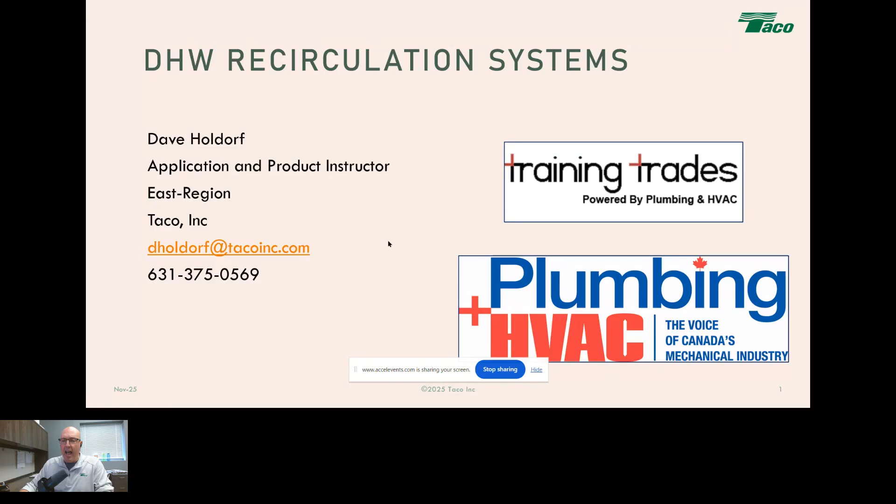So as we get started, I want to talk about why recirc. Why do we need to consider adding domestic hot water recirculation systems installed in homes? It wasn't always that way, and not everybody thinks about having a recirc system installed. But we have to think about history a little bit, and think about home construction and what's happened over the last 50 years. If we want to compare homes from 50 years ago, the average home size in 1970 was 1,500 square feet. Today it's almost 3,000 square feet. And think about the number of people that lived in that house, that house in 1970 probably had 6, 7 people living in it, right? Today's home, 3 to 4 tops. I mean, we can't have kids outnumber parents nowadays, that's insane, right? So with that home in 1970, we never had a chance for water to cool down in the pipes, there was always a line at the door to get into the bathroom in the mornings.

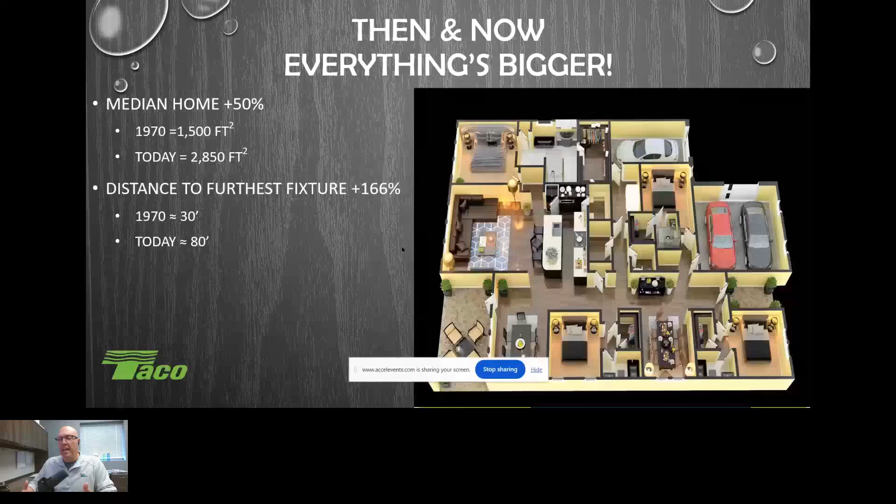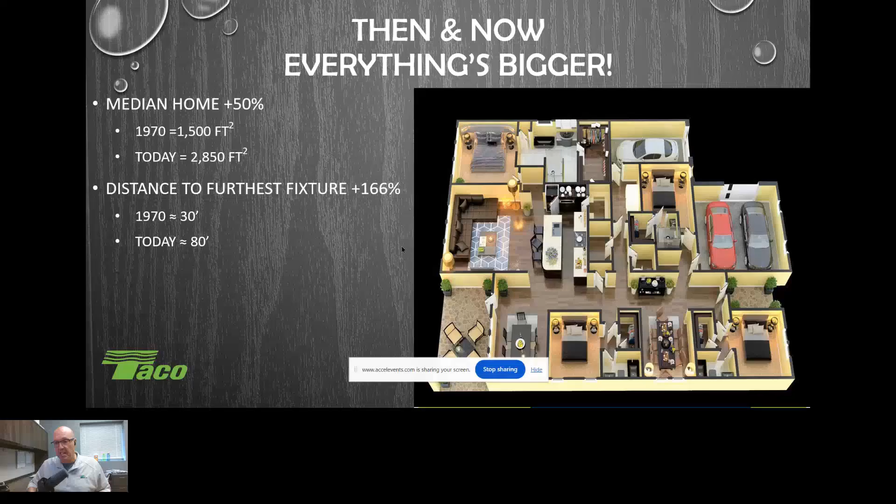So obviously, with home sizes getting bigger, the distance to the furthest fixture has almost tripled. We're putting fixture groups wherever we want. When you think of that home in 1970, that was a stack system, you had your water heater down in the basement, and your kitchen and bathroom shared a wall right above it. So you were 30 feet, probably less than 5, because it was stacked. You always put that water heater right underneath where the water was needed, and shared the wall, so very minimal plumbing. Today we're putting fixtures wherever you want throughout the entire structure. Obviously, by doing that, we've also doubled the number of hot water fixtures installed in the house today, and that doubling of fixtures also increases the demand for domestic hot water.

For example, even in my own house, I did a renovation 10 years ago. As I was renovating, I did a complete gut: new plumbing, new electrical, new heating, new insulation, everything. As I was replacing the outdoor spigot in the front yard by the driveway, I put in a hot-cold valve. I wanted the ability to have hot water at the driveway if I wanted to, because at the time I had a lab, and we loved going on hikes in the woods in the mud. If anybody's got a lab, you know how dirty they can get on a nice hike. So I wanted to be able to hose her down in the driveway after a walk, or wash the truck, whatever.

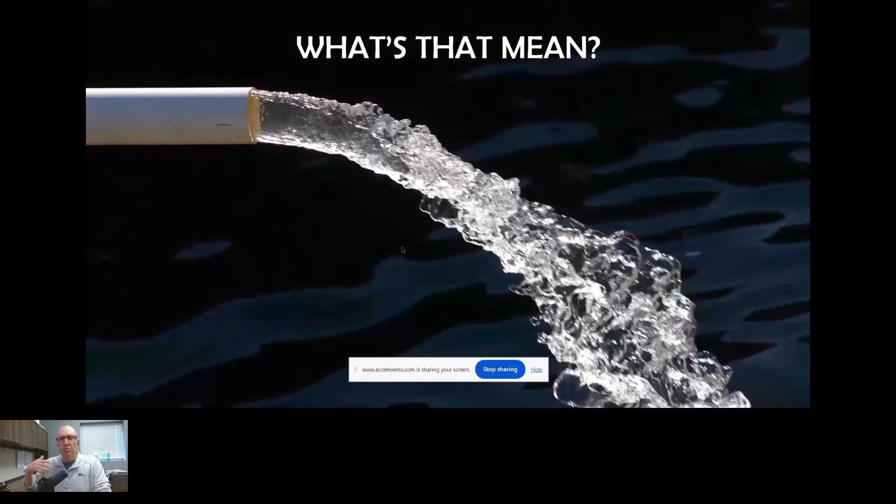So your number of fixtures have doubled. What does that mean? It's getting bigger, but what does that mean to delivering hot water out to your house? The more fixtures you have, the more volume of water needed, especially when it comes to plumbing codes and sizing your pipe. Because you have more volume, you're going with bigger pipe. Think of a home in 1970 — it was plumbed in half-inch copper, you're done. Today we're looking at 3/4 inch and 1 inch, if not more, on some projects. So you've got bigger pipe.

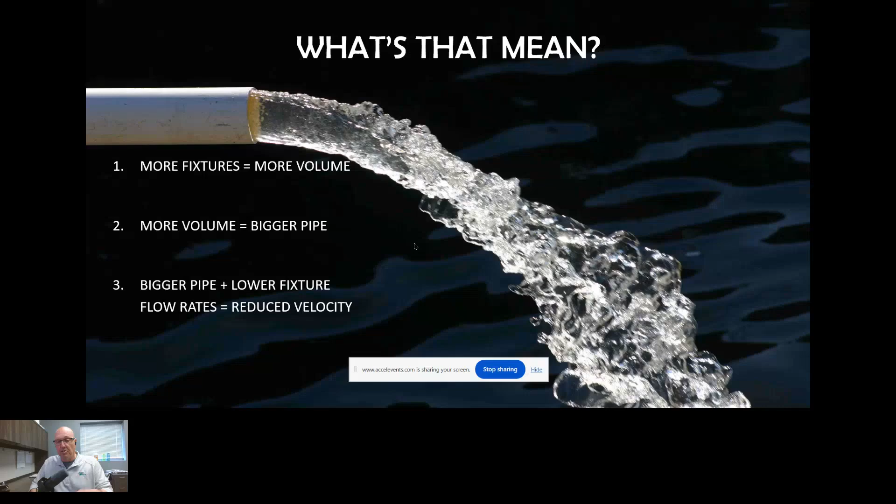But then things have changed. The fixtures, and the governments get involved, and we start seeing low flow rate fixtures. Think of that shower head in 1970 — that was a 6 gallon a minute flow rate coming out of it. Today it's 2.5, 2.25, and there's two coming. So now you've got this lower flow rate coming out of your fixtures, and the velocity of the water has dropped tremendously. So we have low velocity and an increased distance to get to that furthest fixture.

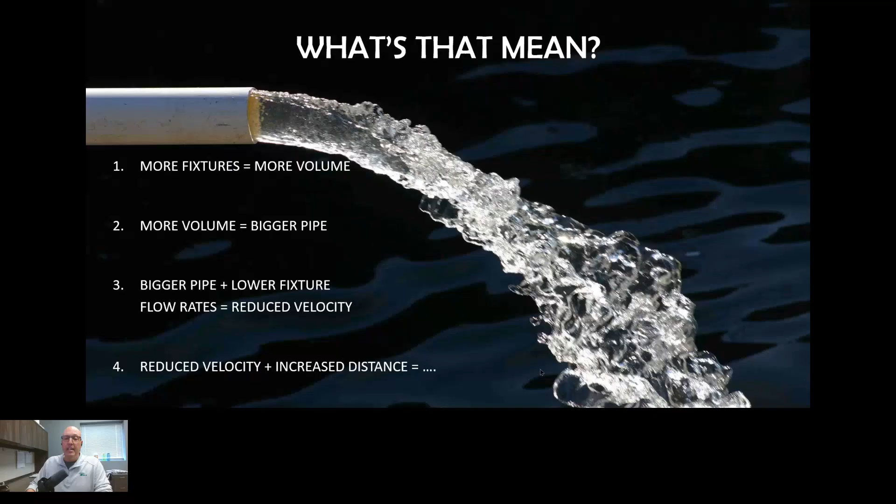When you do the math and the calculations, today people wait 18 times longer than they did in that home in 1970 — 18 times longer. They're waiting for hot water and they just live with it. They just deal with it, they don't do anything about it. They just say, well, that's the way it is.

So when you look at it, the average family of four will waste 32 gallons a day waiting for hot water. I want you guys to think about this for a second — how long do you wait for hot water in your house? Most people here are going to say maybe a minute, under a minute. You're not sure, you throw out a number, you don't really time it. Nobody's ever really stood there, turned the shower on in the morning, put their hand in the shower, and started hitting a timer to do that countdown and see how long it takes to get warm.

Most of the time, if you know you have to wait for hot water, what do you do? You turn the water on and go do something else. So it's very easy to waste 32 gallons a day, which equates to about 12,000 gallons a year. To put that into relationship with something, that's a 10 by 20 pool. And to really notice how much water that is — a tractor trailer you drive by on the highway holds about 9,900 gallons. So you're wasting more than a tractor trailer full every year of water while waiting for hot water. So whatever the application, that's what happens.

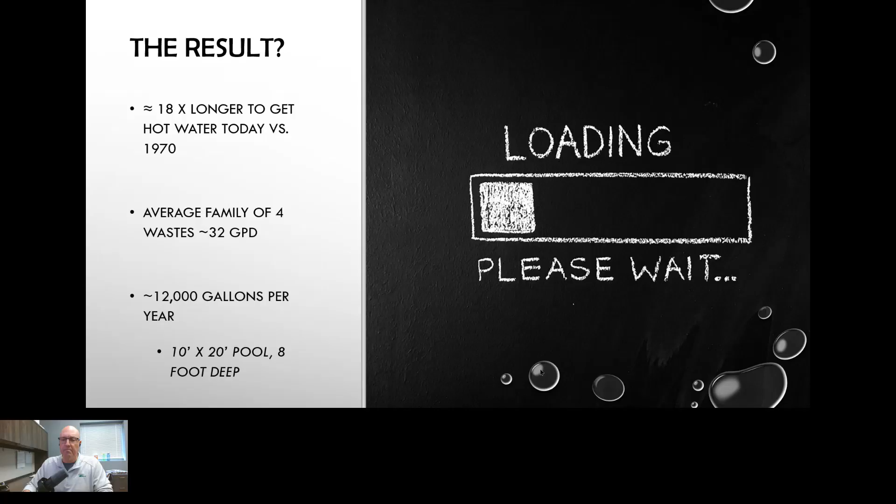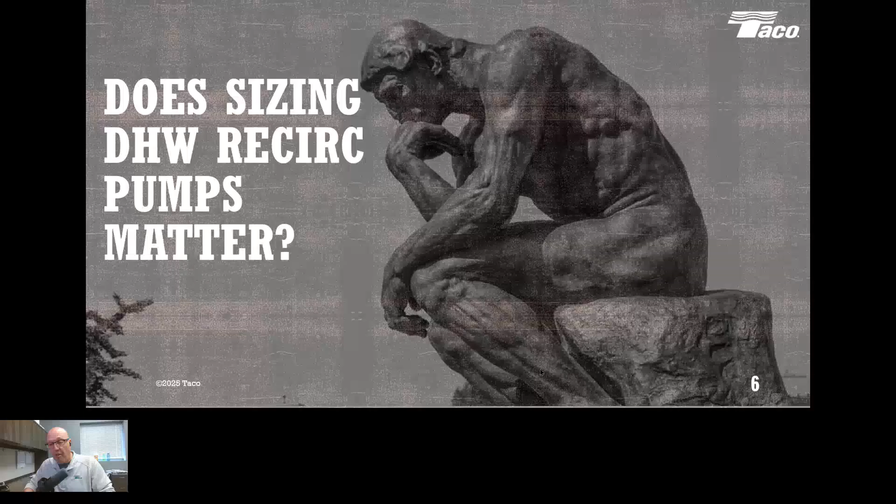So that's what we think about when it comes to domestic hot water recirculation. Does sizing the pump matter? I really want to get into sizing today and make sure we use the right circulator. So does it really matter in sizing your circulator? Do you just want to put in whatever you've got laying around and say, hey, I'm going to move the water there fast? Well, not necessarily. Sizing becomes very, very important, because when circulators are way oversized — and you may have heard this in some of my circulator sizing classes for heating systems — you don't want to have a big pump, you end up with high velocity.

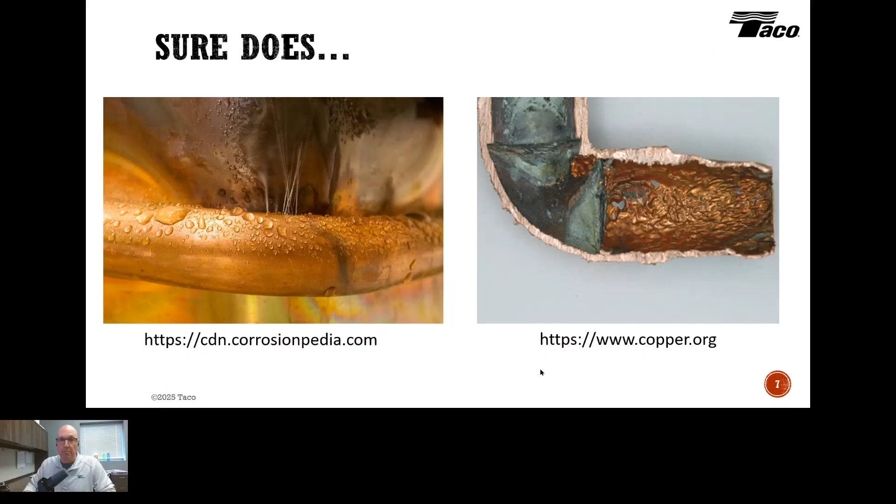Now, we're not using copper for plumbing, we're going after plastic pipes and PEX. Well, not necessarily. That's not impervious. Yes, PEX does have its advantages, but high velocity also has issues that you can cause on PEX. Now let's start taking a look at hot chlorinated water moving at a high velocity. That starts creating problems in PEX tubing. You can see some issues there.

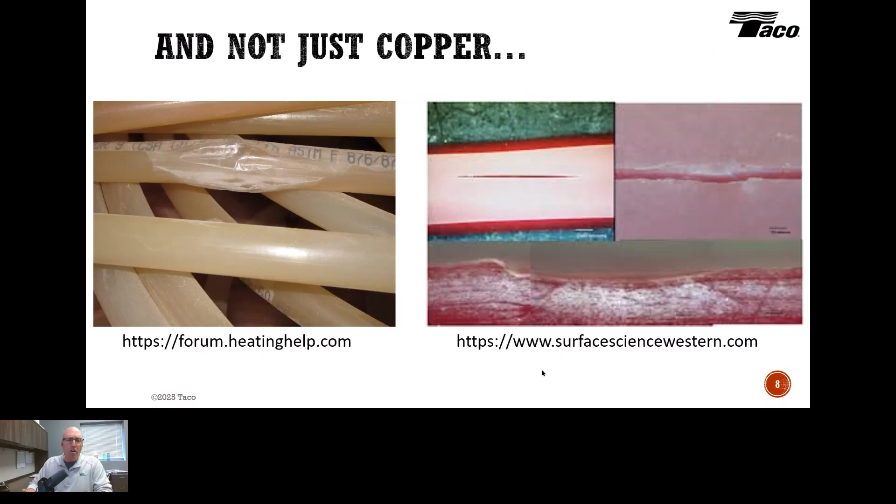So it's not the product's fault, it's the velocity of the water that we're pumping through the system itself. So if I want to give a definition to what recirculation systems are.

I hate reading from slides, but this one is very powerful to me in reading from it. The definition of a recirc system, a hot water recirculation system, is a plumbing system that replaces hot water to the fixtures without draining and wasting the water. Recirculating systems mechanically move temperature from a water heater to the fixtures. That's important to think about. It's temperature, it's not a large volume of water. What we want to do is prime the pipes, is really what we're looking to do. We want to make sure that the water doesn't cool down in your plumbing system, and make that hot water available right when you want it.

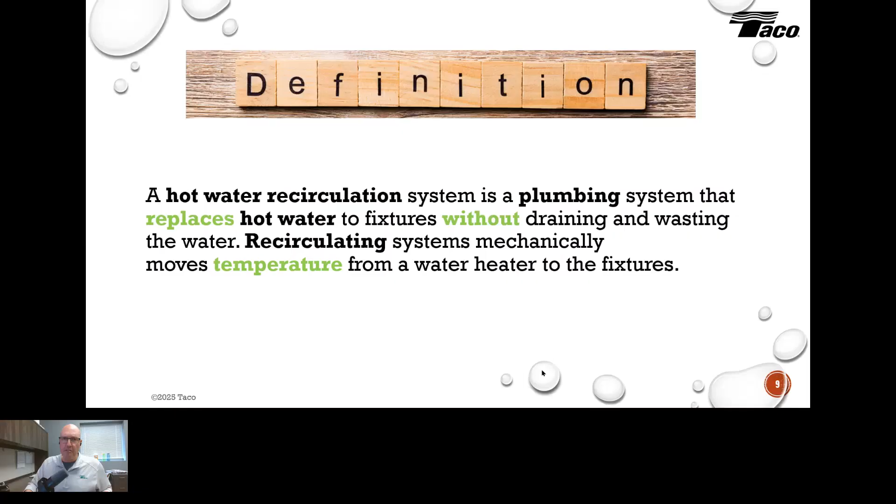So it's clearly defined in many, many places out there on what we can and cannot do. And so this comes from the Copper Development Association, and you may have seen me talk about this booklet before, this handbook coming out by them, and I talk about it in sizing circulators on the heating side of things. But here we start talking about the velocity that we're going to experience in plumbing systems.

So you'll see here in systems where water temperatures routinely exceed 140 degrees, lower flow velocities such as 2 to 3 feet per second should not be exceeded. 2 to 3 feet per second. So that's important, and we got to keep that velocity down low.

Now, this is for recirc, this isn't for your plumbing systems. If you notice in the paragraph right above that, velocities of 8 feet per second for cold and 5 feet per second for hot. We can easily see 140 degrees get a little bit over in some of our recirc systems, but during your plumbing systems or plumbing draw with your fixtures, those are short spurts. You can handle the higher velocities of those short spurts, but when we're looking at recirc now, different design altogether. And of course, locally aggressive water conditions combined with these two considerations can cause high erosion corrosion if system velocities are too high. So this is coming right from the Copper Development Association.

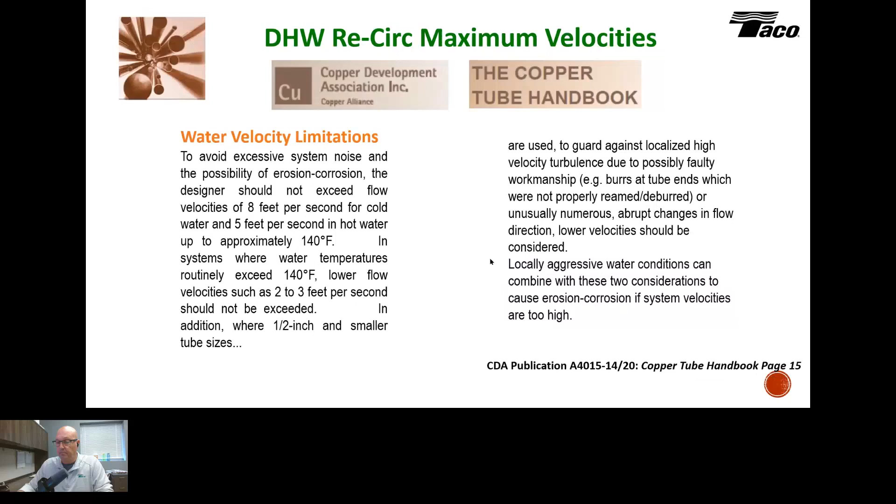So here is a chart that we've made, and if anybody wants to get their hands on one, we can easily get it for you. But you really just need to pay attention to this is converting your feet per second into a gallons per minute maximum, not necessarily a target. You should be lower than this, but it's a maximum.

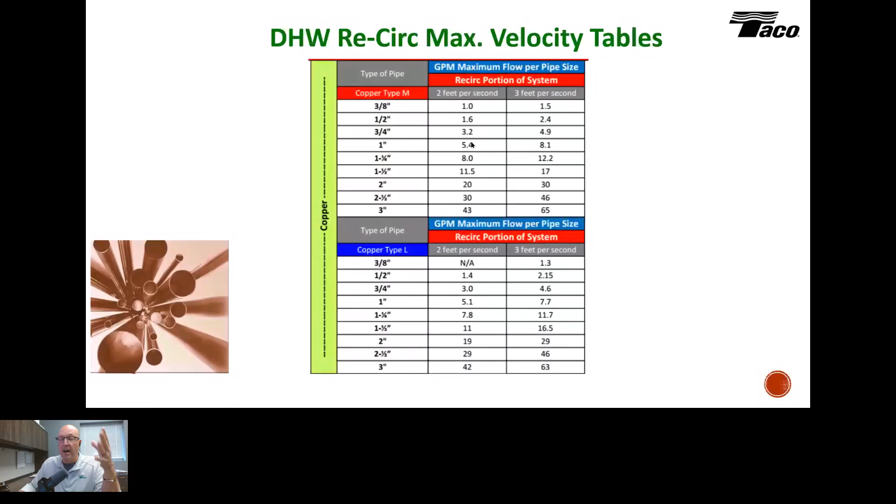So, for example, if you had your smallest pipe, if you're using a recirc line, and we'll talk about designing it in a little bit, your smallest pipe was going to be 1/2 inch copper at 2 feet per second. Your maximum flow rate is going to be 1.6 gallons a minute, keeping that 2 feet per second. If you had 3/4 inch, 3.2 gallons a minute. So we're not looking at very, very high velocity of volumes of water, GPMs here.

But let's talk about PEX for a second, right? So PEX, they have their own rules in what you can do with PEX tubing. So a couple things to pay attention to: recommended velocity for cold water piping, just for the cold water piping, is 10 feet per second. And if we take a look at the hot, they want to see 8 feet per second. That's what we mean by the draw with the fixtures, not the recirc. They have a separate section on recirc.

And now they talk about we want to see 2 feet per second in the PEX world, no more than 140 degrees, and make sure you design it properly. Okay, so those are the important things to pay attention to when we start looking at PEX tubing.

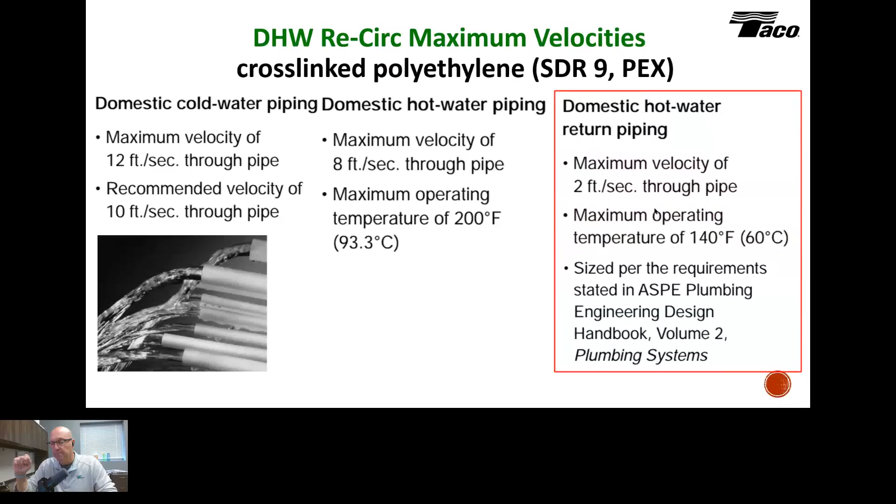And when we take a look at this, since PEX does have a smaller ID, we do see the flow rates are smaller. We're looking at 1.1 at 2 feet per second on 1/2 inch compared to the 1.6 on copper. 3/4 inch is almost a whole gallon a minute less.

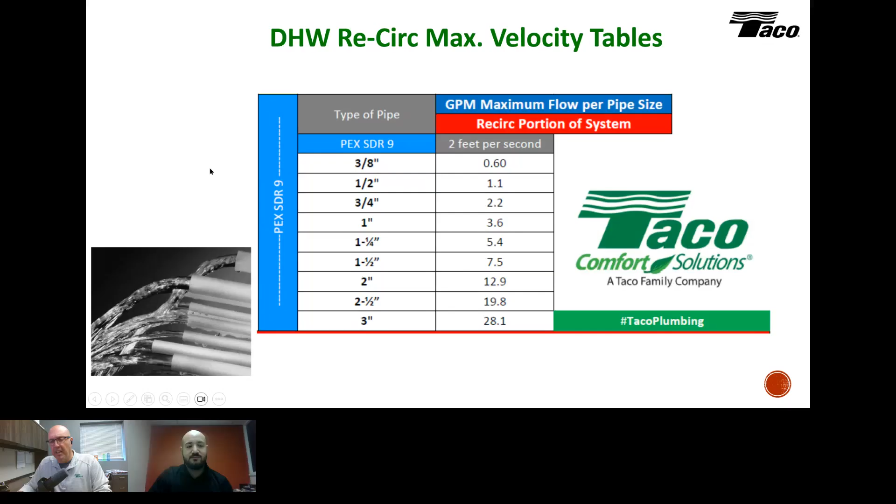So what causes these pinhole leaks that we were just talking about? Like I said, elevated temperatures over 140 degrees, or 140 and above, can easily happen in a plumbing system.

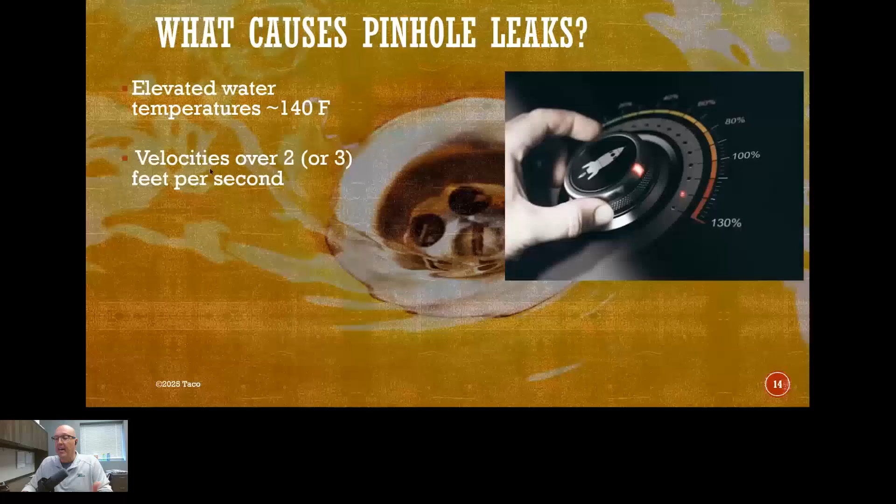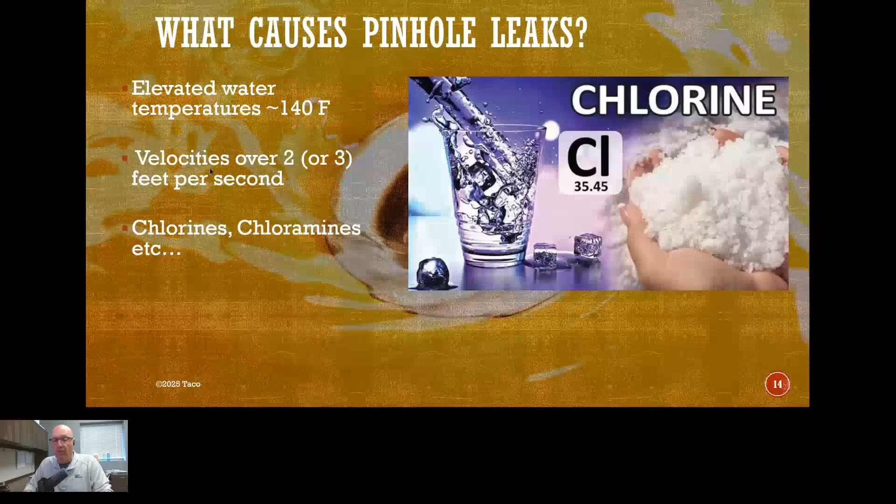Again, high velocities—once we exceed those 2 or 3 feet per second, the high velocity is going to start creating other issues as well. And also all the chlorines and chloramines and whatever else is in our water. We don't all live in Maine, right next to Poland Spring, where the cleanest water in the world is coming out. So it's still going to be clean water, but it's still going to have all these chlorines and whatnot in there. And constant circulation.

All right, we don't want to see these things running continuously. Okay, so that's going to create the issues.

So what do we do about that? Well, all we have to do is do some math. We're going to keep calm and do some math. If you've ever been to a training class and I did not bring up a math formula, then you weren't in my training class. There's always going to be some bit of math that we're going to do, and it's nothing hard—we just got to figure this out. We want to know what you've got going on to size the system itself.

So let's take a look at this quick example. We've got a house with a standard water heater—this is showing a tank style water heater. We've got a mixing valve coming out, a circulator here, and we're feeding out with some 1-inch pipe. We've got 10 feet coming out, 20, 30 of one—so we've got 50 feet of 1 inch. Then we've got some 3/4 inch—70 feet of 3/4. And we've got 10 feet of 1/2 inch.

And what we're looking for in order to do the math, we need to know about how much pipe and what size is there. When you are doing this calculation, you might take a look at it and say, well, I have no idea—this is an existing home.

If you notice, my numbers here all end in zeros—you're going to do a quick measurement here. A lot of times when we see a system plumbed like this, the water heater is going to be on one side of the house, and the pipe runs right down the center and we tee off. I don't care about the tees.

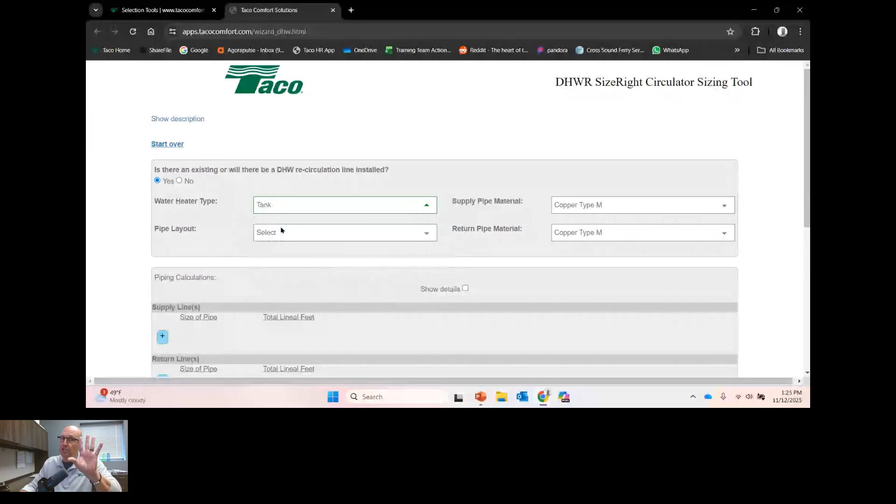The first thing it's going to ask is, is there an existing system or will there be a recirc line? For our application, we're going to hit yes. We're going to choose our water heater—here we're showing a tank style, tankless is a different design. And we're going to choose our piping layout.

This one is a trunk and branch with recirc, and you choose the types of pipe—I'm going to leave in copper as our design pipes here. We scroll down a little bit, and you come to your supply lines, and it asks you what size pipe. We're going to start off with the 1 inch, and we had 50 feet.

We had some 3/4 inch at 70 feet, and we had some 1/2 inch at 10 feet. And then we come to the return line, and we add 1/2 inch there, and we type in 80.

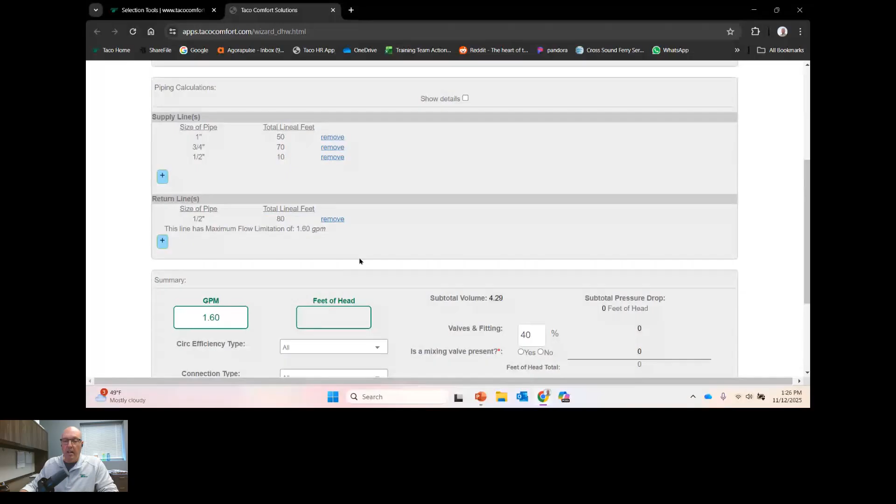Once we do that, the program comes online, does the calculations, and figures out everything for you—what your flow and head of the system's supposed to be. Because I put in 1/2 inch tubing here as my copper return pipe, it says my maximum flow rate is going to be 1.6 gallons a minute. It dropped it in there based upon 1.6 gallons. It tells me my head loss of that length of pipe all the way around, at 6.5 foot of head.

And maybe you don't know the install, so you don't know what went in there—you don't know how many valves or fittings or elbows or anything like that. And this is giving you a 40% overage—it's adding some fudge to your calculation.

So if you know there's not many fittings in the system itself, the pressure drop's not going to be higher. Remember, every elbow you put in has the equivalent pressure drop of about 2.5 feet of copper pipe. And if you have a mixing valve in there, you add that—that also gives you your head loss calculation and adds the pressure drop through the valve.

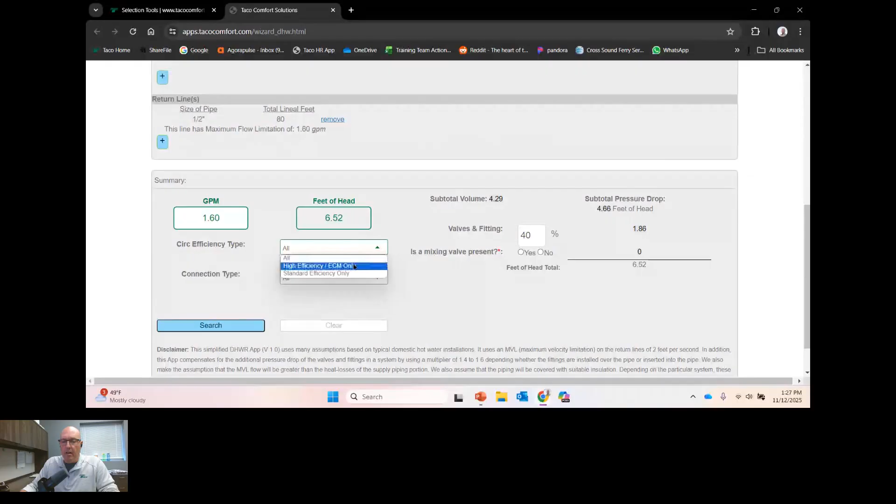And then we come here and let's say we're going to select our circulators, hit search. Here it's going to give you a couple of different models. But what I really want to show you is how you set up the circulators and making sure how do you get that 1.6, because there's no flow meters on these things. And I don't want you to put a flow meter in there.

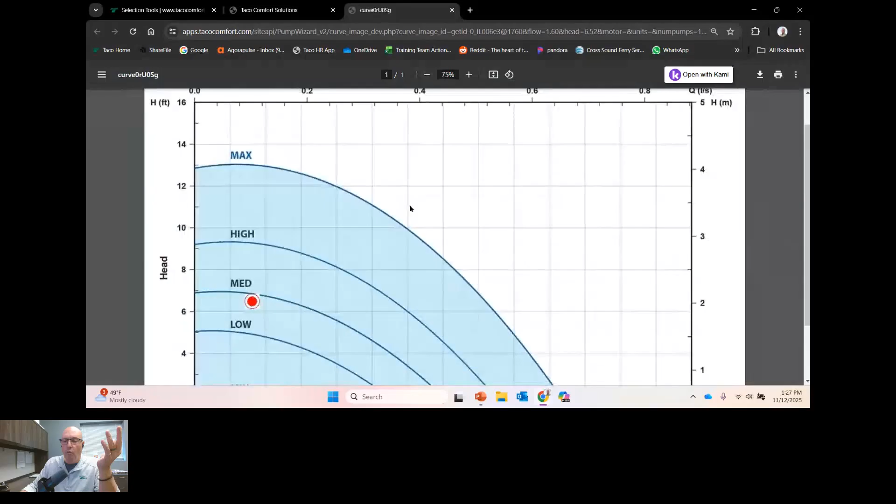So if we go ahead and click on this circulator, you'll see the pump curves, it's going to show you what setting. That's our design point right there: 1.6 gallons a minute at 6.5 foot of head.

You're going to set this circulator up at the medium speed, which is going to be around, say, 20 watts of power. On here, it comes out of the box on high, which means it's going to be pumping way up here and sending 3 to 4 gallons a minute out to the system, having high velocity.

That's what we want to pay attention to. So you want to keep it low, and you could even go lower if you really wanted to. It doesn't mean much. So if I come back to my design, let me close this for a second, and let's take a look at what's actually going on here at 1.6 gallons a minute.

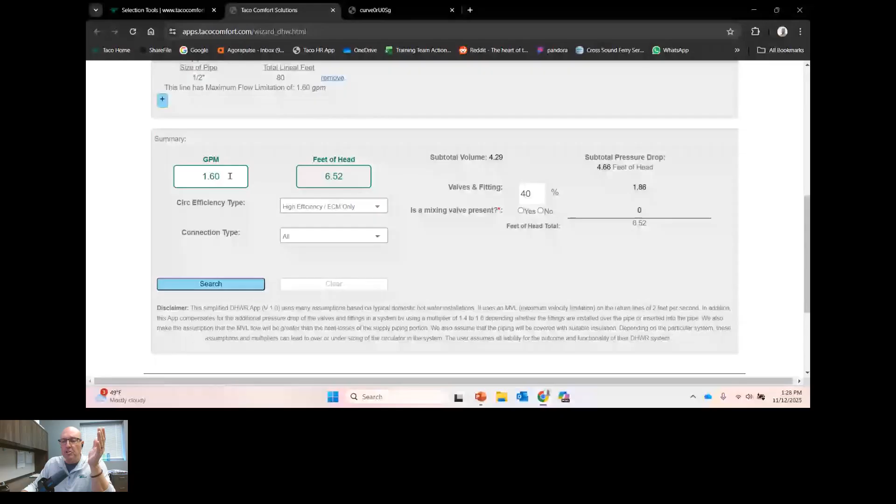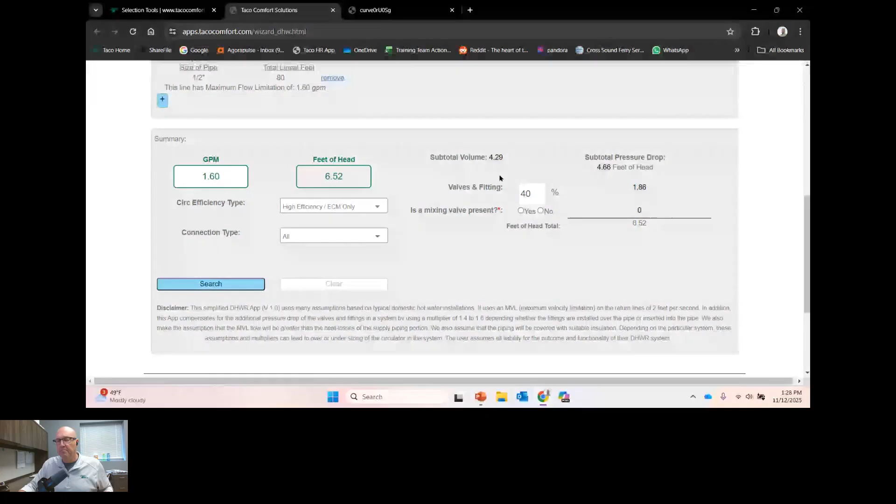Meaning in 1 minute, 1.6 gallons have moved out of the pipe. Our goal is to take the water that was in our hot supply lines that cooled down and replace it with hot water coming from the water heater itself. So how much water's in there? Well, it tells you right here, 4.2 gallons is what's there, that's what's in the pipe. So the total run of pipe there is 4.2 gallons.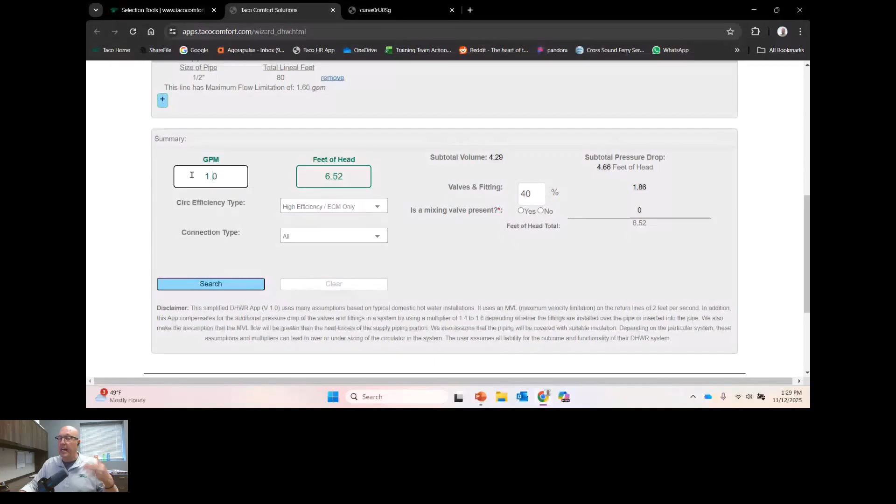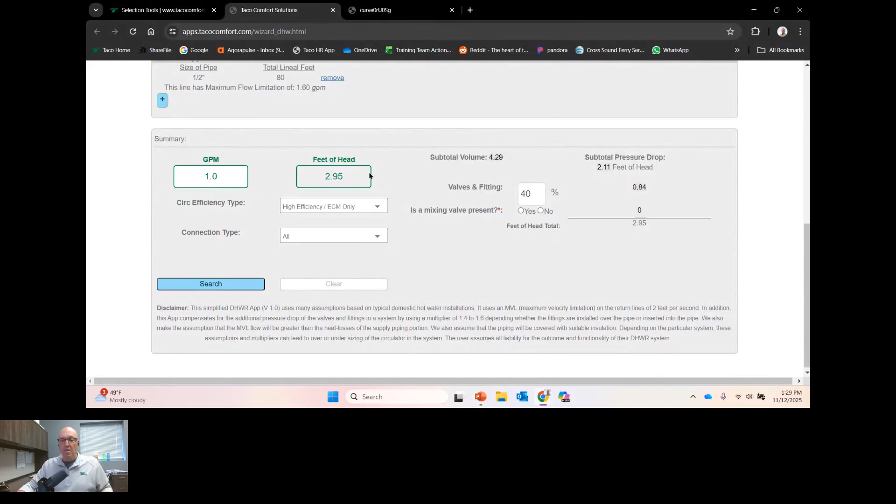So I don't need this thing to run very long in order to replace it. I could lower this if I really wanted to. Let's say if I put it at 1 gallon - that's why this box is white, allows me to put a different number in there. And if I change it to 1 gallon a minute, it redoes my head loss calculation. Which means in 4.5 minutes, and I just did that to make the math easy here, with a circulator running at this speed that gives me 1 gallon a minute, I've replaced all the hot water in that pipe.

So as we come back down, if I hit search, we've got a new design, and we click on the pump curve, and you'll see here we're running right there on about 5 watts of power. That's it, in order to recirc this. And that's also another myth to our homeowners out there - they don't want to put a recirc system in because it's going to consume a lot of electricity. It's like leaving the light on in the basement all the time. We don't want it to use a lot of power here. So if you're using one of the ECM circulators, this is going to keep it really low power.

So I want to come back to the question here on that poll. I see the percentage of homes that have recirculation installed is about less than 2%. So those of you that answered 3%, you got kind of close - it's less than 2% of homes out there. Now I will ask this of everybody out there: how many homes need it? That's the important question, because most homeowners have no idea this stuff exists.

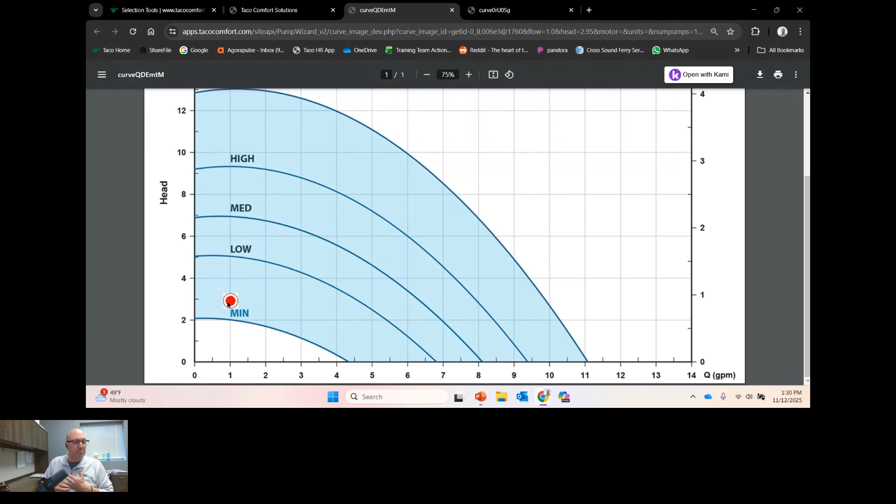They don't know what exists out there. And quickly, we had a question in here from the chat from Vitaly. He asked, why M copper? It is only for closed loop system, should be K or L copper. I have those in the options as well - I just left the default so I can move along and keep the time going. So you have the options of choosing PEX and PVC in that program as well, so that was the only reason why I chose that. You can do the other types of pipe in the app itself. Thank you for the question.

Awesome. So I want you to think about that. Less than 2% of homes have recirc out there, but they all need it. Most homeowners don't know this stuff exists - they have no idea that it's out there.

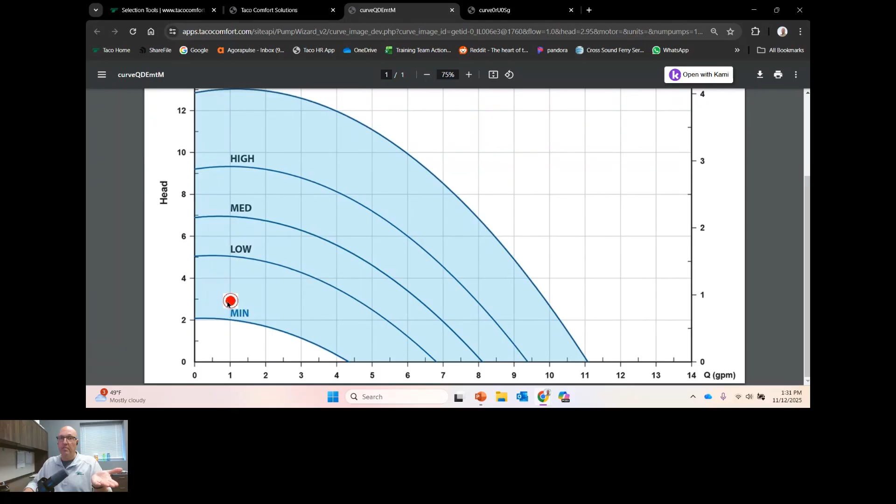Okay, so all your job is to present it to them. You're in their house doing some kind of work on the water heater or whatever. Just let them know—they may not want you to do it then and there because when they see a bill at the end of the day... Okay, you're there to fix something. But if you're draining the pipes or draining the air bubbles out because you did some work, and you're standing at the kitchen sink waiting for the water to get warm, just say these words: 'Does it always take this long?' I can fix that. Now, it might not mean today, but if you plant the seed, let them know it's not repiping the house, it's putting a circulator in. Maybe you can't get the return line all the way from the furthest fixture.

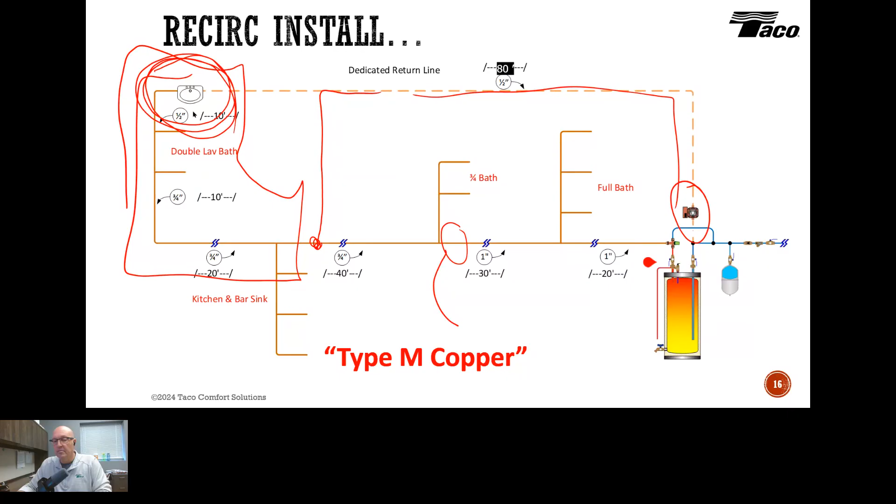So anyways, how do you control the recirc? And there's a poll out there too—I want to see what the answers are. What you got? The best ways to control your recirc pump out there.

Sorry Dave, I just wanted to quickly—we had a question as well. It came right after you finished drinking the water, so it's perfect timing. Awesome, it's from Dean. They asked, 'What about demand water? There is an even longer wait.'

Yes. Not necessarily, because your tank style water heater is storing the energy ready to be used there. But your on-demand water heaters, or tankless—I prefer the word tankless rather than on-demand or instantaneous. When they first came out, everybody called them instantaneous water heaters. And when they installed it and homeowners turned the water on, they said, well, it's not hot, what's the matter? There's something wrong here. No, there's nothing wrong—it's just instantaneously made back there. We still have to deliver it, right? So your tankless water heaters, the only difference is they have a higher pressure drop through the heat exchanger. We've got to make sure that pressure drop is designed in there, and that may increase your circulator sizing.

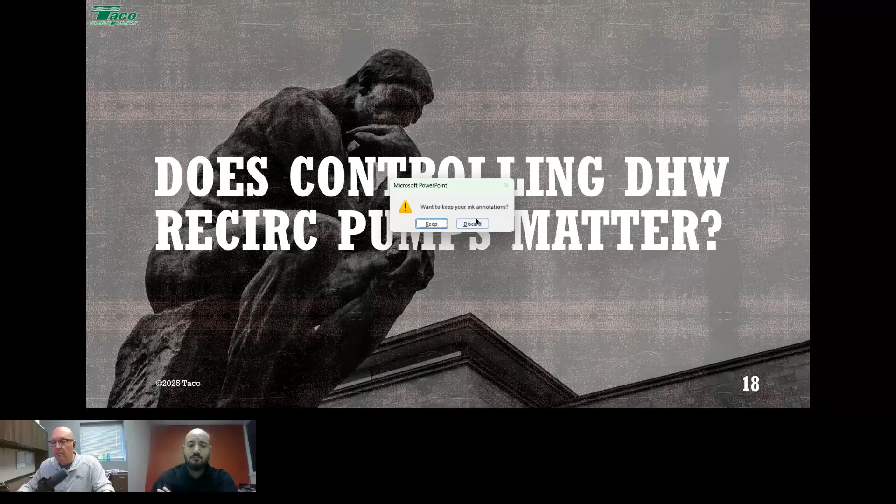So if we go back to the design software here, let's close that out, we come back—whoops, went too far, we come back up to here. Let's start over, oh I shouldn't have hit that. Darn it, well, I could have. All right, that's fine—you come to your tankless water heater, do your pump layout.

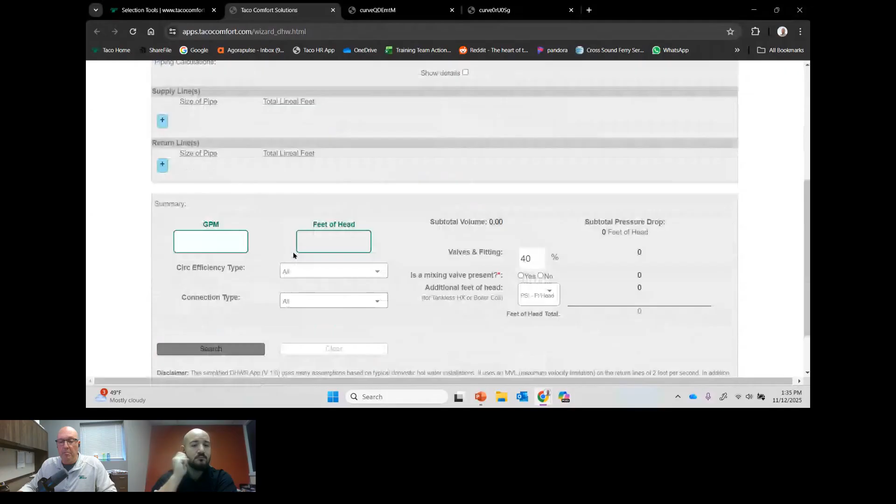As we come down to the bottom here, you need to know your water heater that you're using—what is the pressure drop through that coil? And we're going to put it here. The manufacturers will show you this in a couple of different ways—they might show you foot of head, they might show you PSI. We show you the conversions right there, so you'll just hit the selection. Here's the PSI and pressure drop, and here it is in foot of head. So it depends on which water heater you're using, and that will give you the additional calculation so you can properly size the circulator out there.

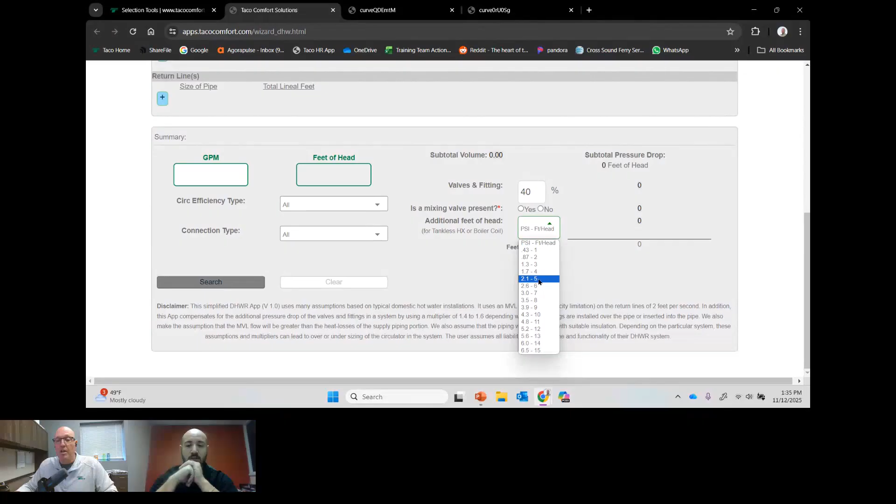So hopefully that answered your question. And we just have a couple more comments from Greg.

They asked about speed or CBV valve, and then they also added in VFD drive. I don't know if you know exactly what they're relating to there, or if maybe we need a little bit more clarification.

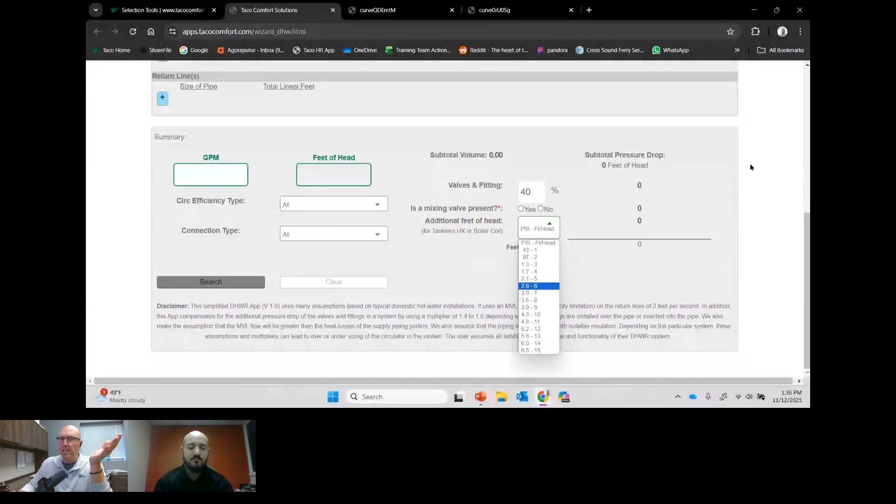So, VFD - I'm looking at smaller residential design here, could also be used in the commercial world, but a VFD drive on a recirc pump I find is not necessary. That means the pump is way too big. What I've seen a lot is circulators sized for the total flow rate of the building, and that's not what it is. Now, this software here is doing a residential design. If you have a commercial design, it's a different calculation altogether.

What we need to do is figure out what pipe you have, what's the heat loss of the pipe itself, and your delta T that you're working off of. So this is showing smaller ECM variable speed circulators, and this one here, our 006e3, has a dial where you speed it up and down. You just turn the dial, and that's the speed the circulator runs at. It goes from a minimum of 4 watts up to 44 watts, or as low as half a gallon a minute up to 11 gallons a minute. And that does a lot of projects out there.

So I caught the VFD part, but I wasn't sure about some of the other comments in that question. So you've sparked some good questions coming along. I'll read them quickly and then we can get back to the presentation.

First off, we have more of a comment from Brian. They say, when we switched from a water tank to tankless, we observed that the water pipes were much colder, as there was no steady conduction through the copper lines from the hot tank. I don't know if maybe you wanted to comment on that, or if that's pretty standard.

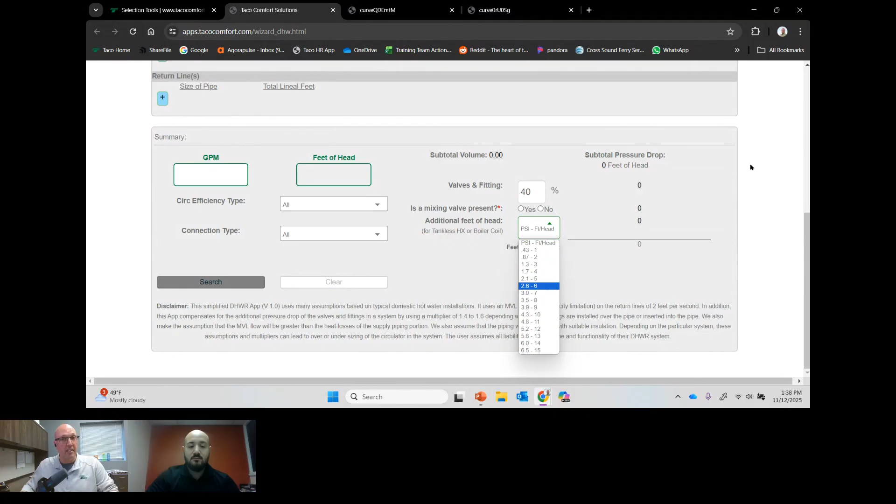It still will lose heat. So you get a little bit of that conduction and stacking of the water coming out of the heater, and that's where we start to see elevated water temperatures in tank style as well. Your temperature sensor in a tank style is about three-quarters of the way down, and that water can stack up. So when you go tankless, it's all about efficiency at that point, but it doesn't change much in the delivery of the water itself, because the water still cools down in the pipes as you get further away from the water heater. So we still want to do some recirc in there. It might be seconds less if you had that stacking in the pipes themselves, but the stacking created other issues, like scalding effects, so you've got to be careful of that as well.

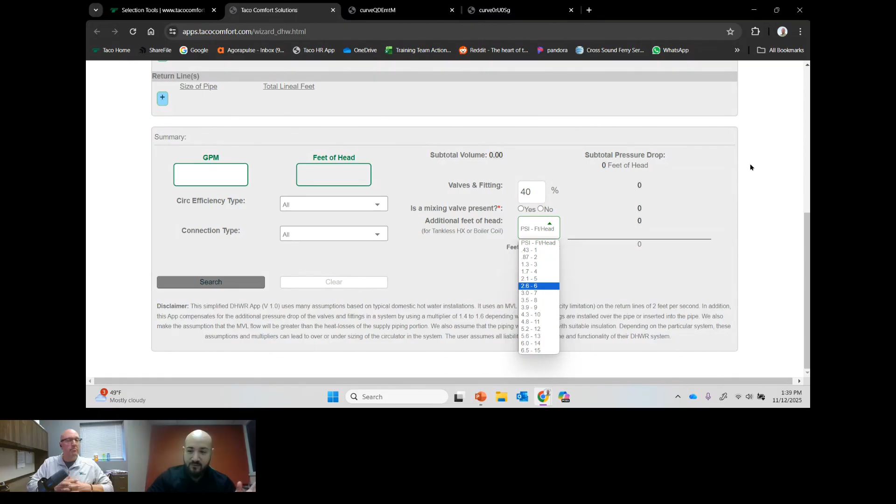And then the last two comments, back from Greg and Dean, following up with the question they had beforehand. Greg adds, some pumps have speed selectors on them, or CBV, circuit balancing valve. And Dean adds, you have to wait for the pre-purge of the burner as well. Yep, okay, I got you.

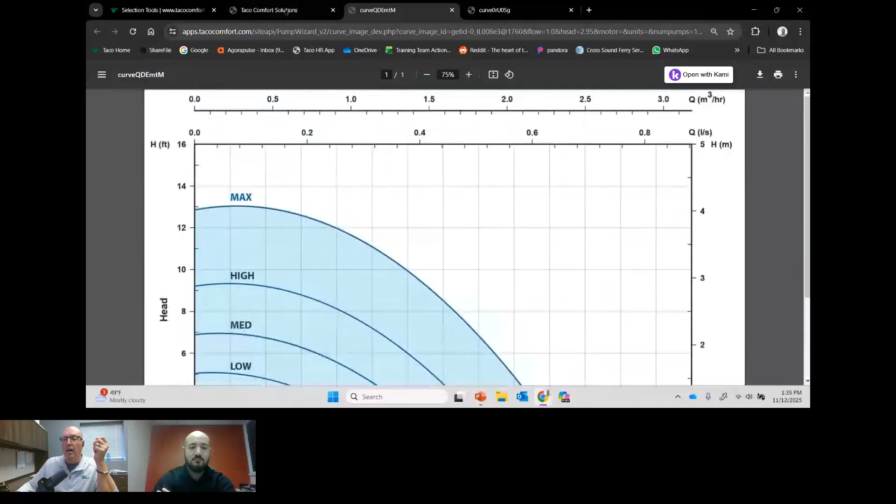Let me... okay, I don't... all right, I thought I had a picture of the dial here. I would have to go back and put some numbers back in here.

Let's come back to this. We had 70 — no, we had 50 there, so we stayed the same. We had some 3/4 inch at 70 feet, and some 1/2 inch at 10. My return line is 1/2 inch at 80. Done — do the math again.

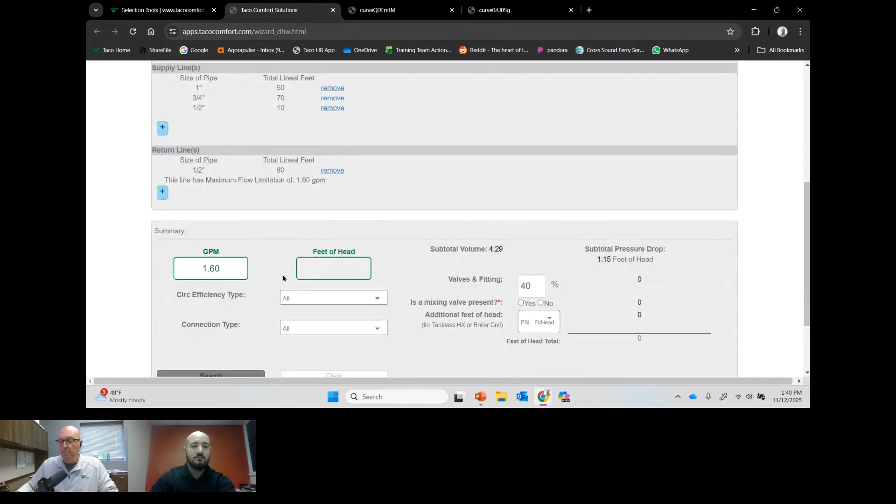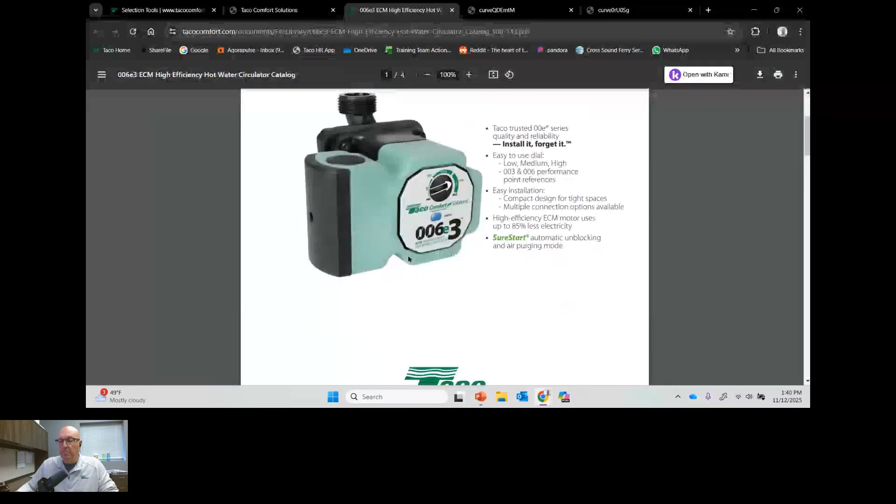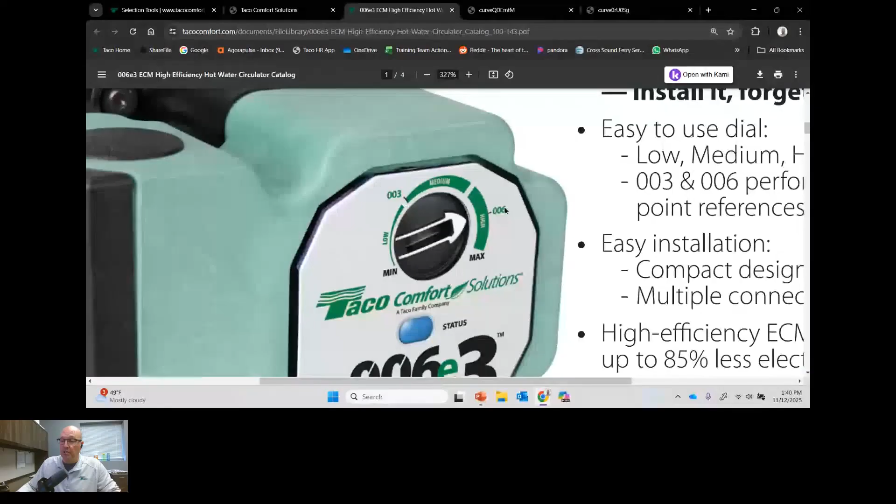Let's take a look at that circulator here, and pull up the catalog sheet, which gives a nice big picture with some ideas. You have a minimum and a maximum. There are markings showing where our 003 circulator is and the 006, which is one of our most common. The instructions also show what low, medium, and high represent in length of pipe for your system, to get you close as well.

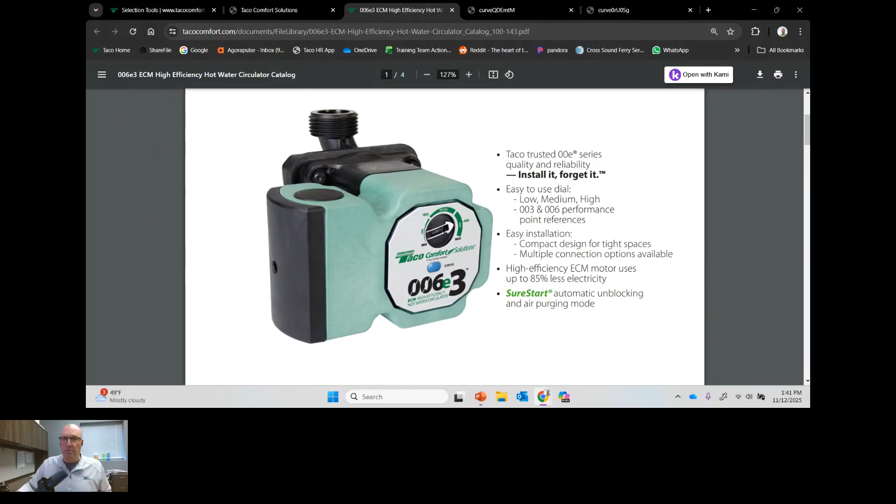There's a whole bunch of new recirc pumps coming out from Taco in the beginning of 2026. If anyone's going to the AHR show in Las Vegas, you'll be able to see them there. Some have different markings on the circulator itself showing flow rates for 1/2 inch, 3/4, or 1 inch pipe — whatever your smallest pipe is — to make sure you're pushing it to the maximum without going over. That's what we have coming with some of our newer variable speed pumps in the future.

Excellent questions out there. Balancing valves — again, residentially not used too often. I do suggest it if you have multiple return lines coming back to a system with one circulator on it; you want to use some balancing valves. There are a couple of different manufacturers, and some do it thermostatically as well, opening and closing based on temperature, so it's not over-pumping or under-pumping — making sure you have that flow rate. When you have multiple loops and one pump coming back, that's when you want to use balancing. If it's a dedicated single loop, your balancing is the circulator itself — just turn it to where you need it.

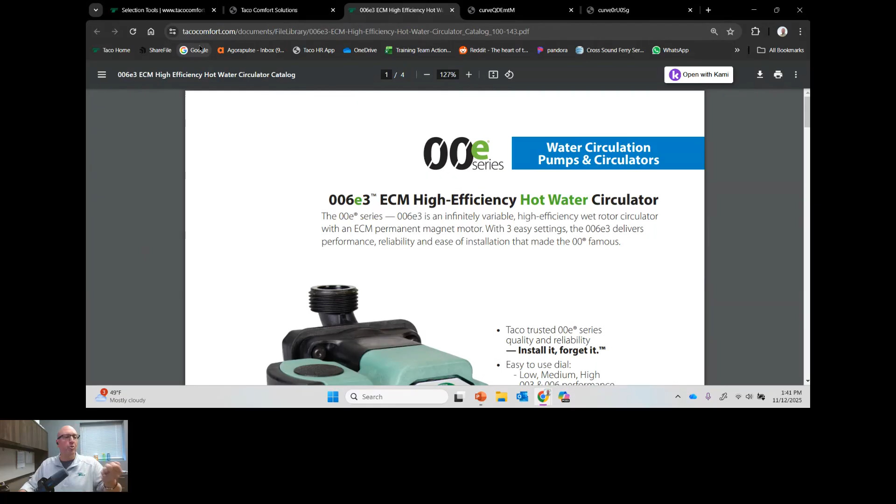So the second poll that's there — I think it was actually poll number one — how do you control this thing? I see a bunch of answers popping up. Awesome, okay, so I gave you about 90% of the answers on how it's controlled, right?

So, 24/7 — I don't recommend that residentially. It doesn't even need it commercially. The only time I see 24/7 used is maybe a hotel or an apartment complex. Do you run the pump 24/7? That becomes a tremendous waste of energy — not just electrical consumption, but that pipe running throughout the entire house ends up being a radiator, constantly giving off heat. But it's done often — I see it often.

We can add an aquastat. We typically put it on the return line right near the circulator, and if the water gets warm at that point, it says 'hey, we're hot,' meaning the whole system's charged — let's shut off. I see a good chunk of people said they'd use an aquastat. The downside is the aquastat shouldn't be where the pump is; it needs to be where the last fixture is in the house — ideally about 80 feet away.

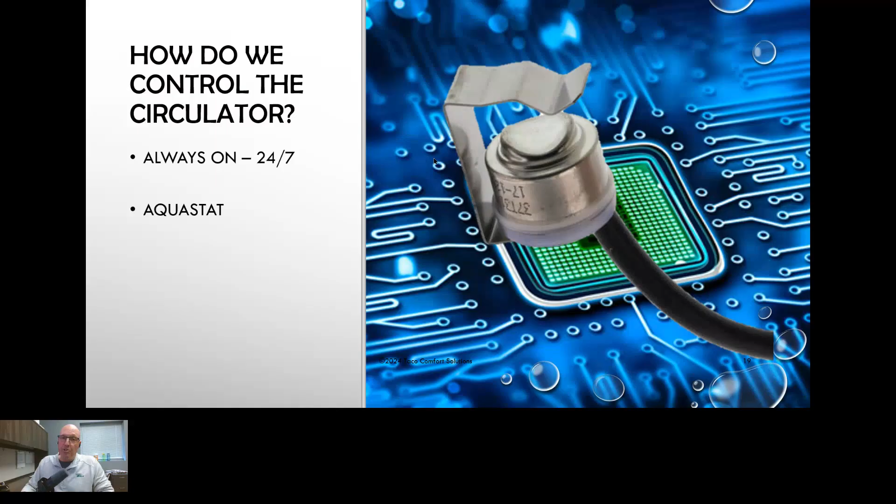Now we can throw timers on here too. Timers are a good idea because people use water on a schedule — a few hours in the morning, a few hours in the evening in a residential setting. In a commercial structure, like an office building adding recirc, you only need it during working hours — when nobody's there, shut it off, turn that radiator off so to speak, and turn the pump off. You can also do a combination of the aquastat and a timer together, trying to keep that pump down low.

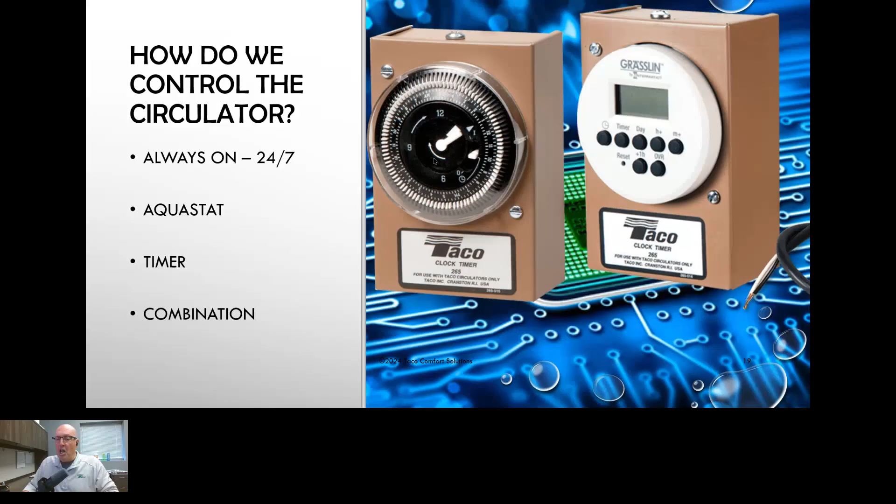Because we want to watch for that velocity, and we also want to make sure that we're not constantly running that water through, creating those pinhole leaks in copper pipe.

Now there's another way that I like to talk about, and I want to compare it to the Nest thermostat for a second. Why do homeowners and people love doing Wi-Fi style thermostats out there? What is the biggest allure to these types of thermostats? I mean, I've got 3 of them in my house.

I got one controlling my air conditioning and another 2 doing some radiant floor heating in the house. Well, why does everybody want these things? I'm going to assume right now 90% of the people out there, what you're thinking in your head is so I can play with it on my phone, right?

Homeowners, they want to do this with it all the time and they want to see it online. They want to see it on their phone. They want to make their adjustments and settings. And actually, that's pretty far from the truth.

I've seen a lot of the data out there, and what happens when one of these thermostats gets installed in somebody's home, the first 3-4 months, they're looking at it all the time on their phone. They're like, 'Oh, this is cool, look at the temperature in the house right now, and maybe I should change the temperature.'

And let me mess around with the family members that are still home at the house, and I'm going to turn the air conditioning on when it's cold outside, and everybody freaks out, just because we can, right? The number one reason these things get installed in the house is for economy of operation.

They want to drop their fuel consumption, but what they're also looking for is to program itself. How many people have programmable thermostats installed in their home that are not programmed? Or if it is, who programs it? So that's why they like these things, because they program themselves.

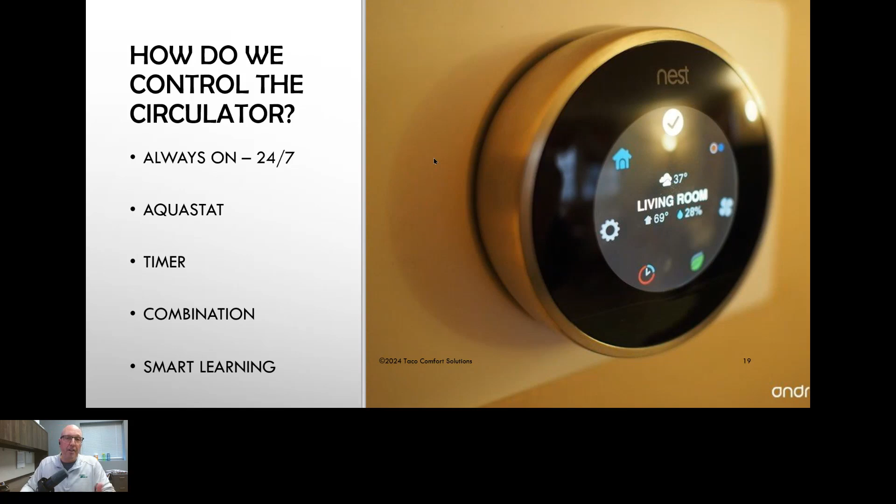Well, we have something very similar out there. We call it the smart plug. What this does is learn when people use hot water in the house, and it runs the circulator just for those time periods.

And the way it does it, it uses a sensor, a temperature sensor. We're not looking for temperature, but what it's looking for is an event, and it says, hey, that's when water was used. And if you don't have a schedule, then this thing just puts the circulator in a pulse mode, an on-off operation, so to speak.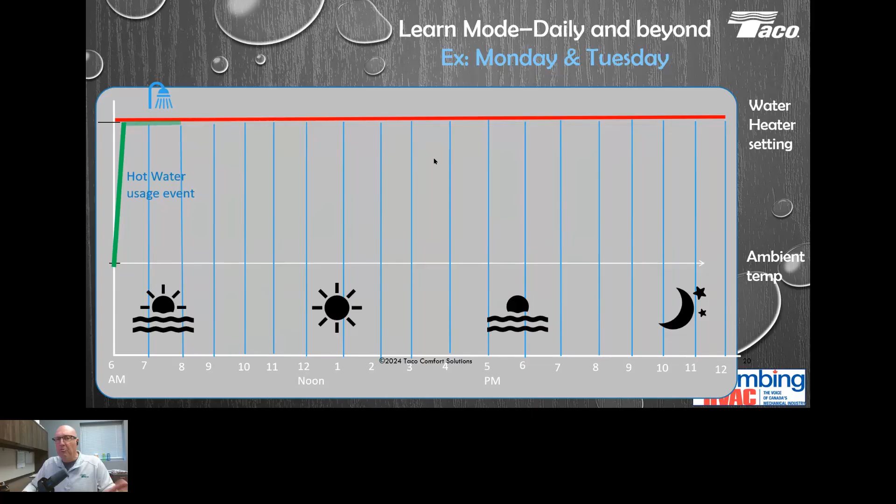It's got a 7-day calendar built in, and it's always thirsty for knowledge, always going to try to learn your schedule, especially changes that happen. So let's say Monday morning and Tuesday, about 7 o'clock in the morning there's usage, and it records it.

Then it says, well, there was nothing after 8 o'clock in the morning. So from 8 o'clock all the way down to say noon, there was no water usage in the house. And then all of a sudden, about 1 o'clock in the afternoon, there was some laundry done on both those days.

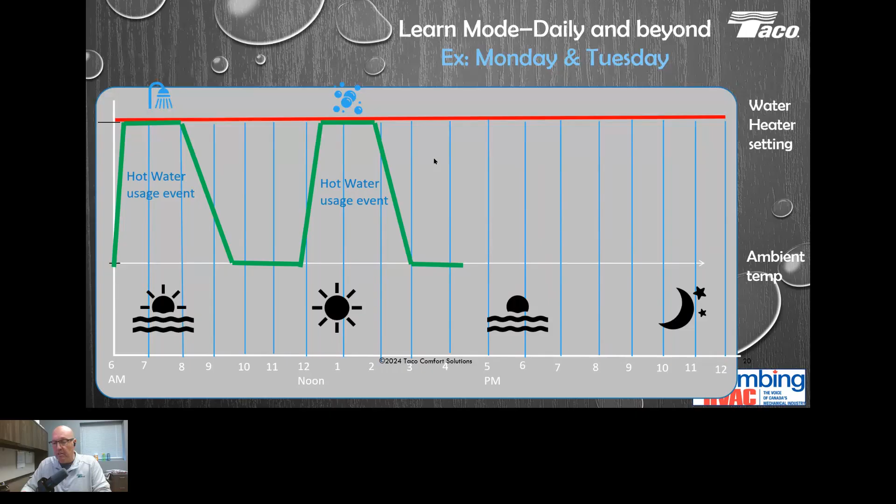It records that as an event. Now we get down between 2 and 5 o'clock, water wasn't used. Now you've got baths for the kids that goes on for a couple hours. And then from 8 o'clock on, there hasn't been any water usage. So what this does is it says, hey, we're going to make sure we'll run the circulator for the occupants.

Okay, and we're going to give you a window of opportunity based upon the length of use of that water. So we know not everybody gets in the shower exactly at 7 a.m. It might be a little before or a little after, but what it's going to do is turn on a little bit before and stay on for a little bit after, depending upon how long that event was. And during this on event, it cycles the circulator 5 minutes on, 10 minutes off, to make sure, one, we keep the power consumption down low, and two, the water's not going to cool down that fast.

Then it keeps it off all day, and it keeps it off all night long. Now we don't have that radiator constantly giving off heat in the house like if we had left it running 24/7. We don't have it still radiating if we put it on an aquastat. Now, it's not bad on a timer, but again, who programs the timer? So when I'm looking at our polls here, we had a very small percentage say, hey, 24/7. We had the aquastat, we had the timer.

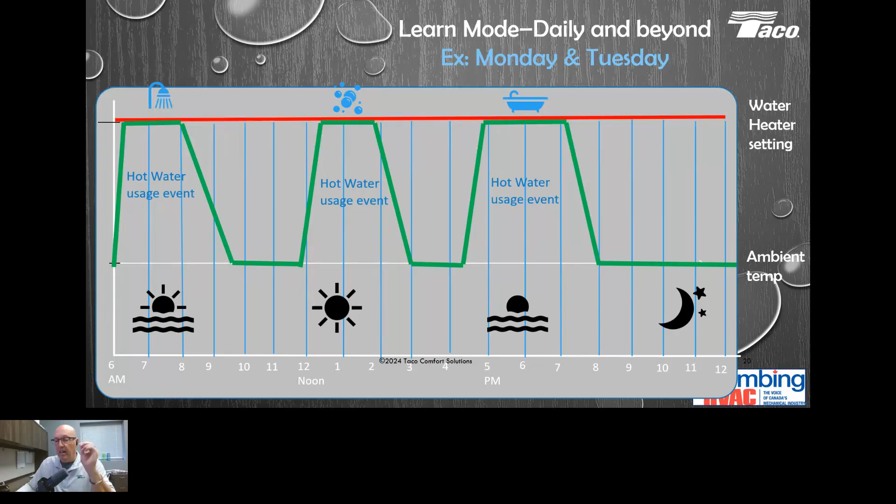They're probably neck and neck, and the aquastat and timer tied together was by far the best. So now we're taking timer, aquastat, and self-learning in your system itself. Let's say on your Wednesday, as the smart plug is learning your events in the house, there's no water usage in the middle of the day. Well, it doesn't run then, and it just keeps the pump off. So here we're looking at per day of maybe a 20-minute runtime, 30 minutes of power. And because we have that 006 on there, turn it way down. So you've got 30 minutes of runtime at 8 to 10 watts of power, really keeping the power consumption down low.

So, eliminate the resistance to adding recirc into a house. Always let it learn.

Because I've talked to a lot of contractors putting timers in there, and they say, who programs it? The downside to timers is that they're electrically powered, which means if you have a power outage, they lose the programming, meaning they don't know what time it is anymore. And of course, twice a year without fail we see daylight savings come through, and that throws off the timers. A lot of the timers have a manual override, which then gets powered on to run 24/7 because a homeowner hated paying that bill after they asked you to come out and take a look at it and say, okay, well, I got up this morning, I went to take my shower, and I had no hot water, but there was hot water in the evening. Well, that's because on Sunday or Saturday we had a power outage for 2 hours.

Storm came whipping through and we threw everything off by 2 hours on a regular timer. This is going to relearn that schedule as well. It also has vacation mode, meaning if nobody's home for 36 hours with no water usage, it goes into off mode until somebody turns it back on again. It also has the option, in projects where you don't need it to learn anything, like a commercial project, an apartment complex, a hotel, whatever, where you put it in pulse mode, which means it runs 5 on, 10 off, all day, all night. Again, not 24/7, but you have those applications where that happens.

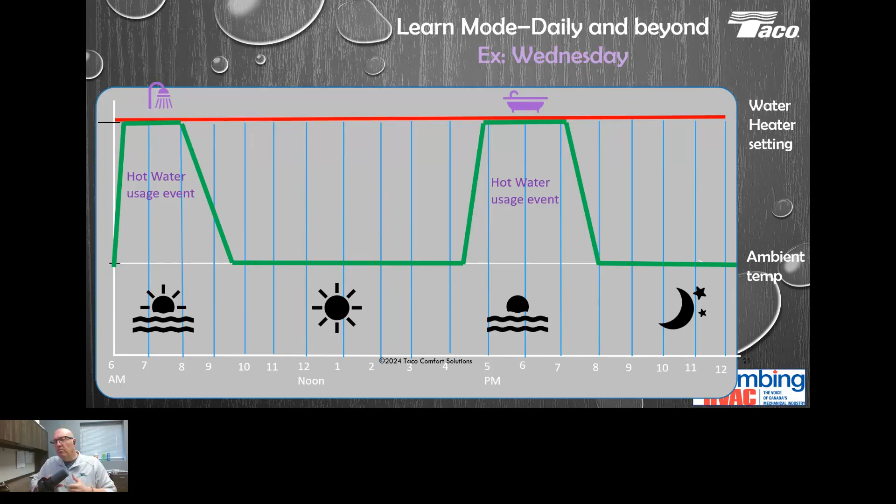So I talked about tank style and we quickly talked about tankless systems out there, but we also want to try to keep this efficiency as high as possible. We want to use the least amount of power. Here, this is a system that's using a circulator that goes underneath the sink now, rather than a dedicated return line. What this is showing is a retrofit application in your tankless world. There's a lot of options out there, and I had to focus on what we could get done in the time period.

So this is your retrofit. Not a dedicated return line, but now we're going to use the cold water supply as a return. This is probably the most efficient system out there.

It is a larger circulator, but it runs on command, meaning when it gets operated by the homeowner. The homeowner turns this on, so it's not learning a schedule. What it does is says, hey, I need water and I want it now.

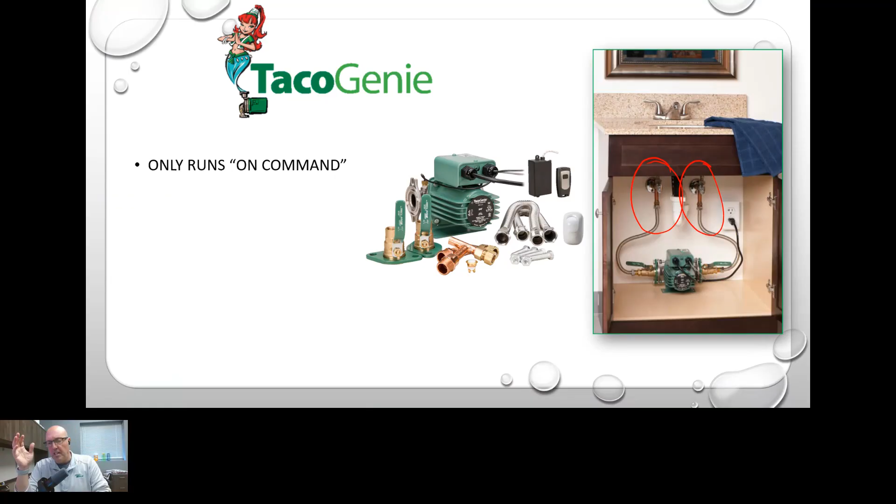So what it does is it turns the circulator on based upon either a motion sensor - you walk into the bathroom, hey, there's a demand for hot water, I'm going to turn on. Hopefully someone's going to use that water in the next couple of seconds.

Or you have a push button. So if you have a high traffic area and you don't want to use a motion sensor, we have a push button that says, hey, we're going to get activated here, I'm going to use hot water right now.

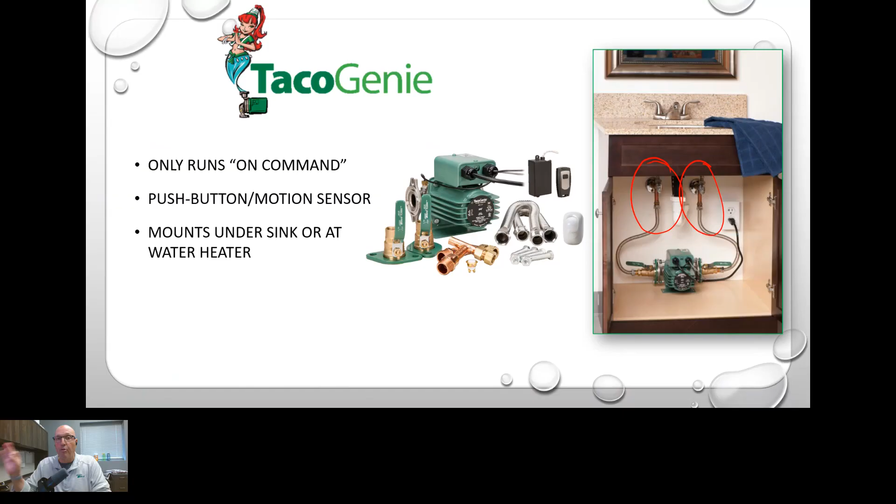So here you can see the under sink installation. We're showing it with tank and tankless, so either water heater here. And you can put multiple sensors in one house and multiple buttons in the house, and a combination of the two. So what this does is it's not looking at temperature, it's looking at activation.

As soon as you walk into a room and the motion sensor or you hit the button sensor on the controller, it says, oh, I got a need for hot water. First thing it does is it takes a look at the temperature. It does have a temperature sensor built into the circulator, and it says, all right, what's my temperature here? If it's below 99 degrees, I'll allow to turn on.

So if what we've got is room temperature water here on the hot water supply, it has cooled down to the 70s - nobody's used it for quite a few hours - the water temperature on the cold water supply is also 70 degrees. So they're both room temperature right now. Let's assume everything here is 70 degrees. We're going to turn that pump on and we're going to achieve an 8-degree rise.

And in the control, an 8-degree or a 15-degree rise, your choice. 8 degrees is usually more than enough. So you do the 8-degree rise, which means as soon as the water here in this pipe gets to 78 degrees, we're going to shut the pump off, which usually means 10 to 15 seconds, maybe up to 40 seconds of runtime is what we're looking for here.

And we took that 70-degree water here and we moved it down the cold water supply back to the water heater to get heated up again. So we're not wasting it, we're not sending hot water to the cold side. That's important - we're sending room temperature water over to the cold side, which was already room temperature. And as soon as we get to 78 here, turn the circulator off. Right behind it is going to be your 120 coming out of the water heater, activated.

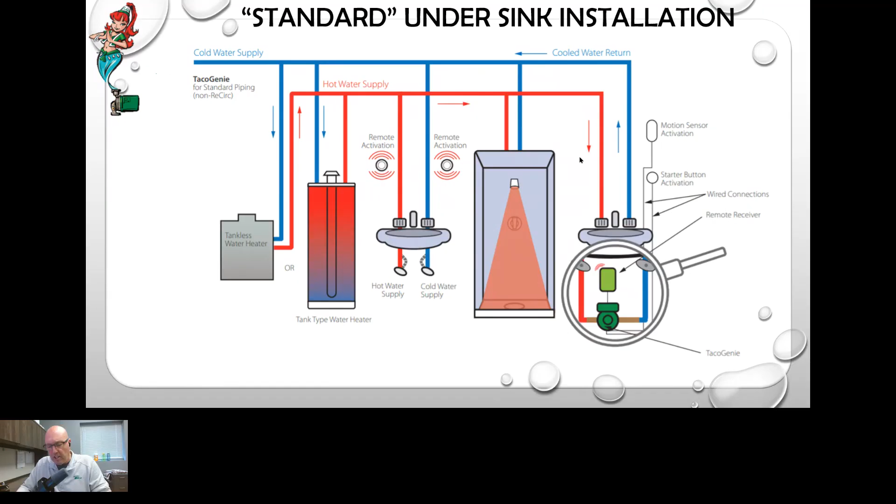So just things to think about, and present it to your homeowners that you have an option for hot water recirc in your house. And here I show it without the dedicated return line as well.

So how are we doing out there, people? All right, I have hit the end, and I think I gave us a little bit of extra time back at the end to throw up any other questions that we have.

Yeah, so we had just one comment made from Brian. This was right after we summed up all the questions we were going through. He added this comment, so I wanted to save it till the end since we answered quite a few questions and wanted to get to some of the slides. Brian says, best practice to curtail recirculation pump operation when returning temperature is detected hot for long enough that the longest loop had time to return its cooled off water. It's this message was a little bit before, more of a comment from before, so I think it was a comment or an answer to one of the questions I presented up there. Excellent.